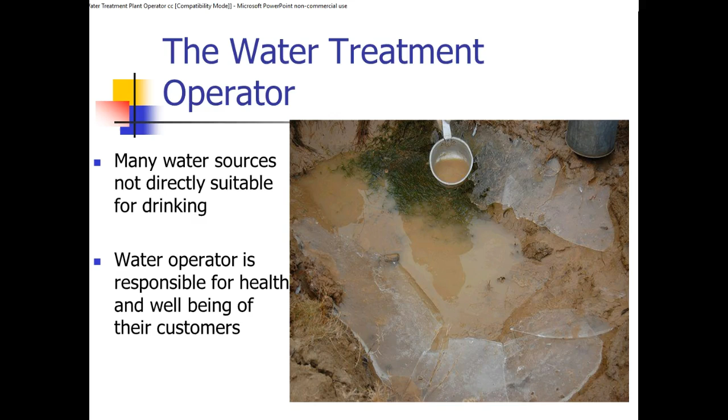The water operator is responsible for the health and well-being of their customers. Operators operate treatment plants to produce safe and pleasant drinking water. You know, through the years, I've tasted a lot of water, and I remember even when I was a kid, it wasn't unusual that we'd travel around to different parts of the country and actually get sick from drinking the water, and it's because of standards. They're very different all around.

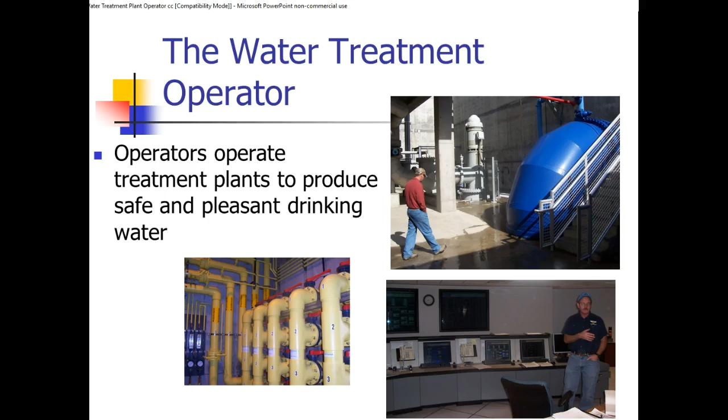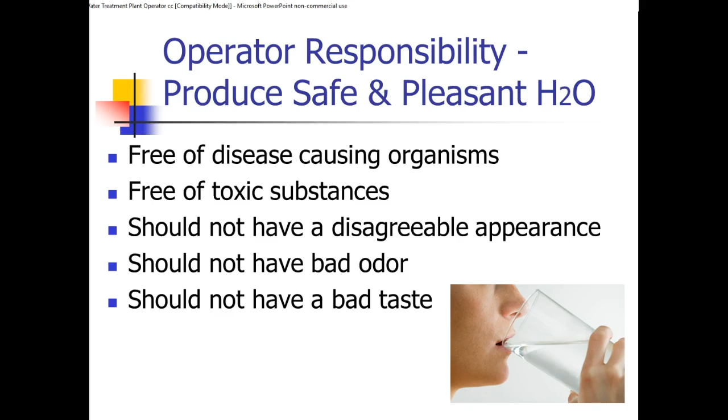But we've got all different types of systems. We have a lot of technology. We have small systems, and we have large systems. Every system's different, and that's one of the things I want to emphasize. So an operator's responsibility is to produce safe and pleasant water, free of disease-causing organisms, free of toxic substances. It should not have a disagreeable appearance, should not have a bad odor, and it should not have a bad taste.

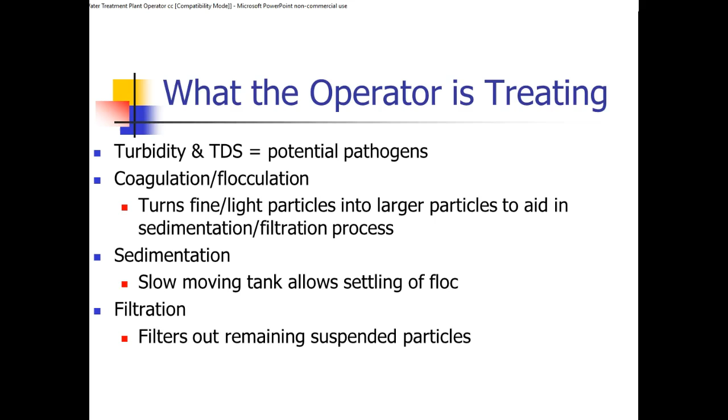So what are we treating in the water? Well, turbidity and total dissolved solids, TDS, because those actually can harbor potential pathogens. Coagulation and flocculation, what is that? It turns fine and light particles into larger particles to aid in the sedimentation and filtration process. Sedimentation is a slow-moving tank that allows the settling of the floc. Those groups that have coagulated and all stuck together gain weight and sink to the bottom of the tank. And then we have filtration, and the filters filter out the remaining suspended particles.

So we take water from the source, and we have different sources. We have two very distinct types of sources. We have surface water, and we have groundwater. Surface water certainly is lakes, rivers, creeks, all that good stuff. And then groundwater is wells. Oftentimes we pre-chlorinate to assist with the post-chlorination processes. Again, we want to disinfect this water. It passes through a series of treatment processes.

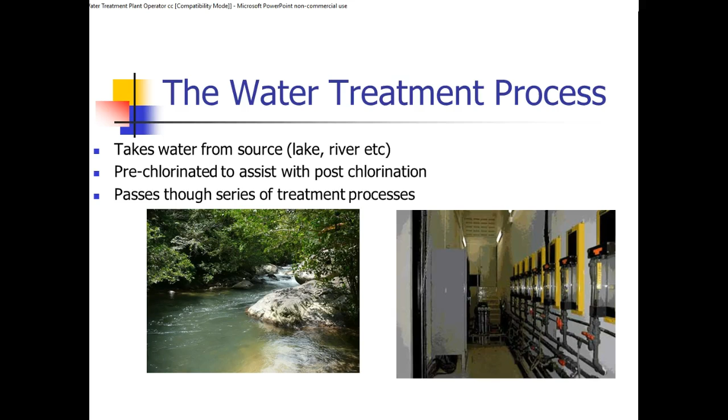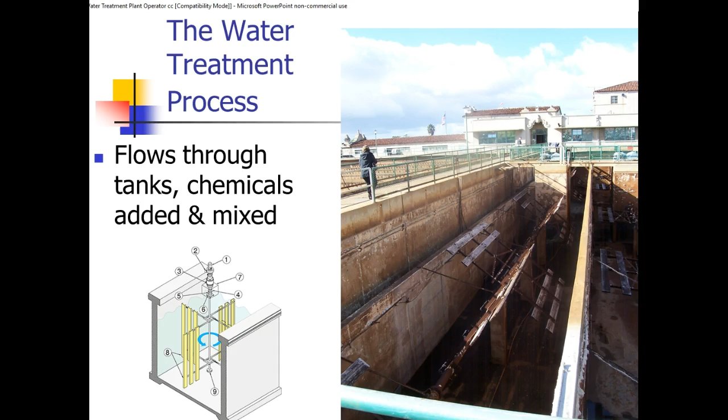It flows through tanks and chemicals are added and mixed. And you can see these big paddles. Those mix in the coagulant and the chemicals to make that start forming floc. We've got all kinds of mixers, but they're generally paddles or something that's going to be slow moving. They flow slowly into a larger tank, and they group together, and then the particles settle out. They go to the bottom.

You can see these weirs, and these weirs are notched weirs. And so the idea is all the heavy stuff's going to settle down to the bottom, and the nice clean water is just going to trickle over these V-notched weirs and go on out into the next part of the treatment plant.

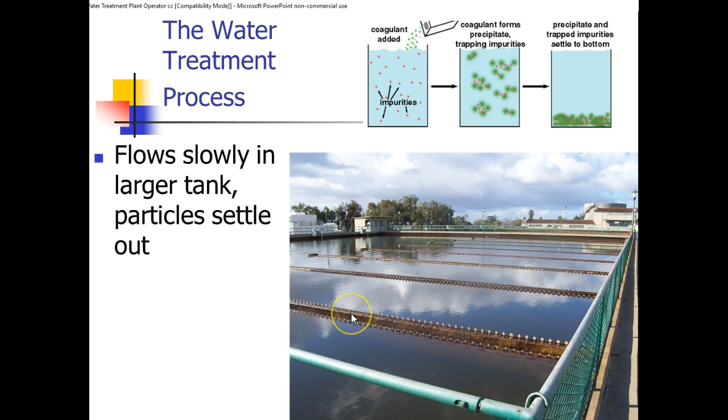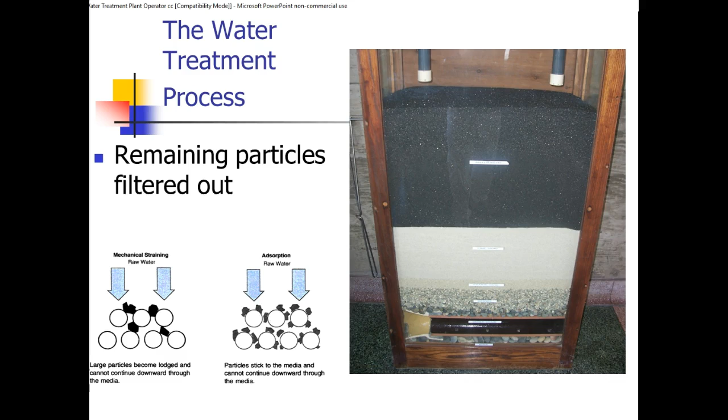So here we're looking at basically a cutaway of some filtration. We've got anthracite and garnet and coal and gravel and many different things. We have mechanical straining of raw water, and large particles become lodged and cannot continue downward through the media. And then we have adsorption of the raw water. The particles stick to the media and cannot continue down through the media.

We add disinfectants. Chlorine is by far the most common. We have three types of chlorine. We have the liquid bleach type, which basically looks like Clorox, what you get on the shelf, except it's a little bit stronger. The stuff you get in the store ranges from 2 to 7% solution. And the stuff that we use in the water industry averages about 12%. So you can see it's certainly a little bit stronger.

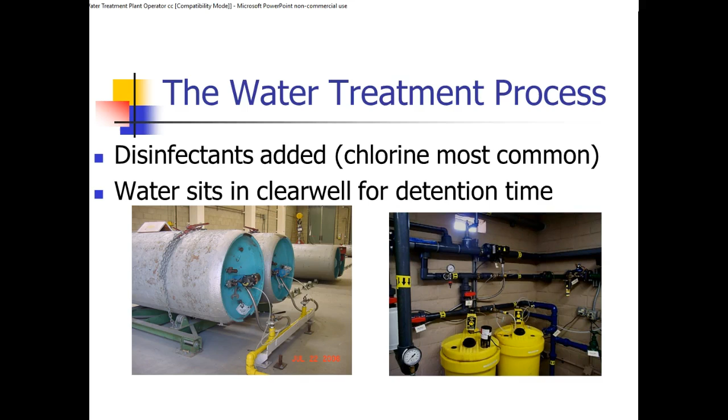Then we have calcium hypochlorite. That's the white powder, or it can come in discs or pucks. You often see that added into spas, and that's normally about 65 to 75% purity. And the third type, the most pure we have, is chlorine gas, which is also the most dangerous. It is 99 point something percent.

But if you look at this graph on the right-hand side, you can see the battery acid, obviously, is on the low end, highly acidic. And you go up to the top end, look at the soaps and the seawater, and it's kind of interesting. But you look right in the middle at 7, pure water, 7.

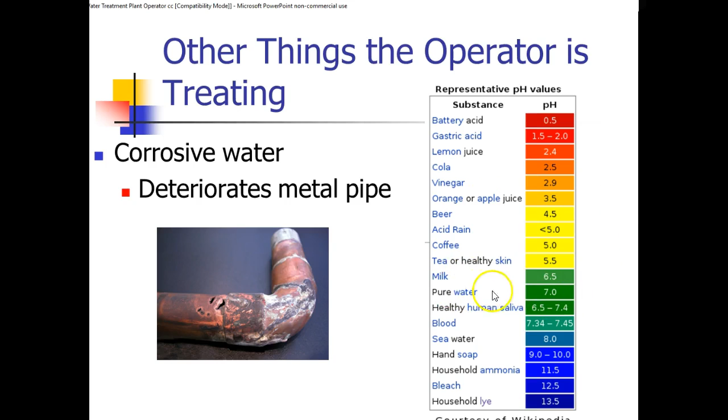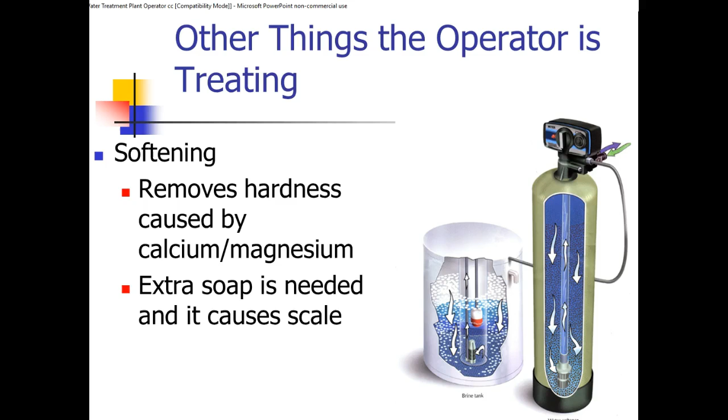Other things that we're treating: we're softening the water, we're removing the hardness caused by calcium and magnesium. I don't know if you've ever gone and washed your hands at somebody's house, but the soap just didn't seem to want to come off, or you were in the shower. And that's a sign of too much hardness.

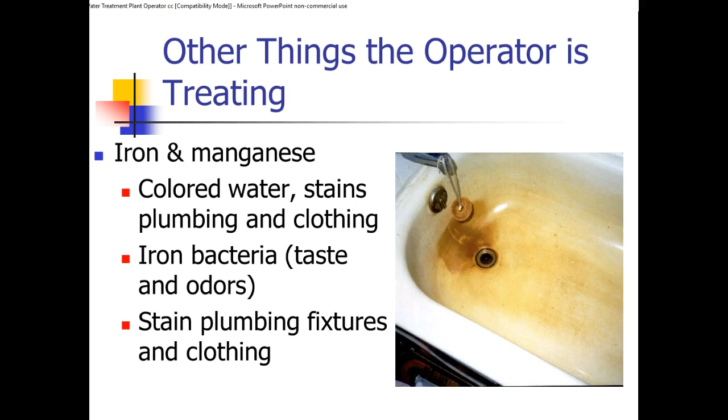So other things that the operator is treating: iron and manganese. Iron and manganese are naturally occurring in the earth. It's colored water and stains the plumbing and clothing. Iron bacteria, taste and odors, stains plumbing fixtures and clothing.

Treatment plants come in all sizes. Here's a small little standalone unit. And one of the futures of treatment is these little individual units that are actually going to be quite smaller than this for residential use. You're eventually going to see residential miniature treatment plants on all homes, period, with some disinfection, some kind of filtration. In the rural areas, there's a lot of good water that comes from wells. But again, that's changing.

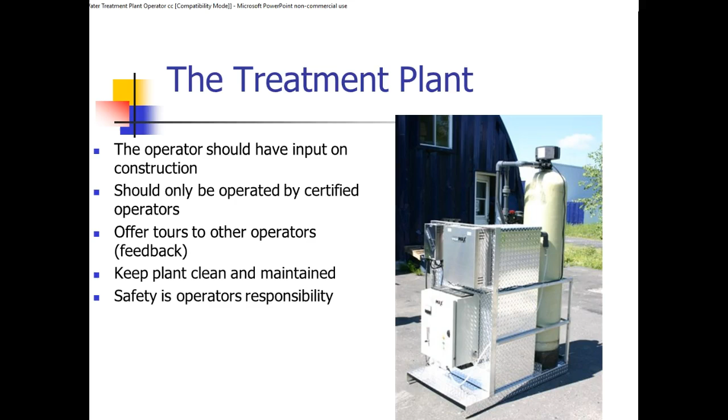A greensand filter is the most common type of filter. It's a special type of sand they call greensand, and it's a gravity filtration. So it's a very slow process of the water going down through it. It's not highly efficient as far as the volumes, but for operators, it's a very simple system because it's a gravity flow that goes down through the system. You often see these systems on small water plants.

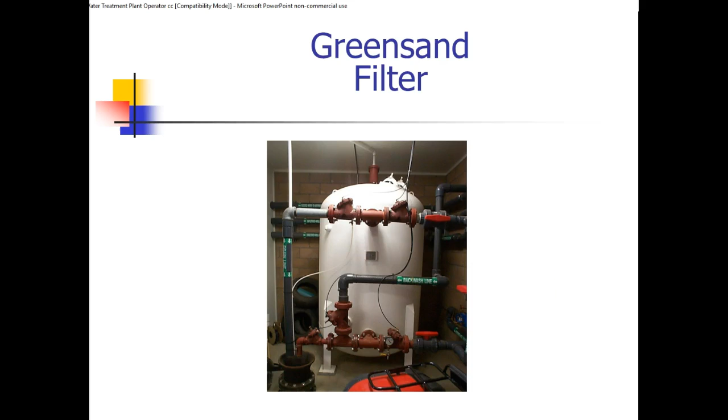There's another one. And again, Culligan, I don't know if you guys know that name, but they are really big in the water treatment business. And they were around even when I was a kid. We used to have a water softener when I lived in the Midwest, so we had very hard water. And the Culligan man would come around and actually bring us bags of salt to put into the softener.

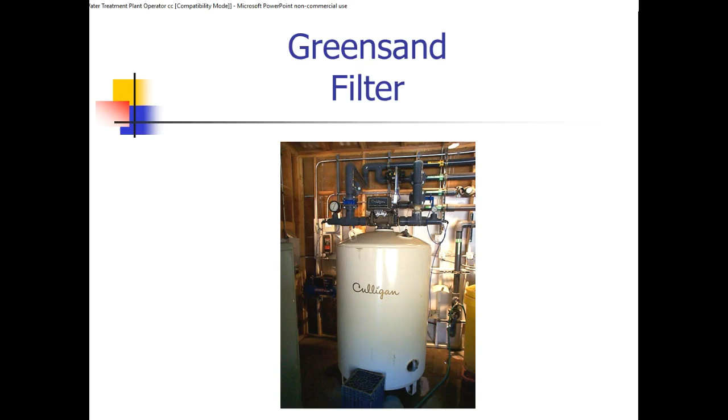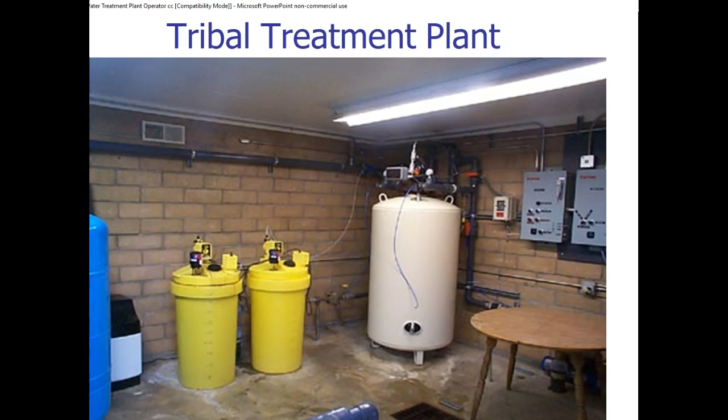Chemical feed systems: these are diaphragm pumps, and they dial in and basically pre-measure into that. And again, a lot of it is digitized at this point, but it basically defines how much feed is going in, mixing the chemicals.

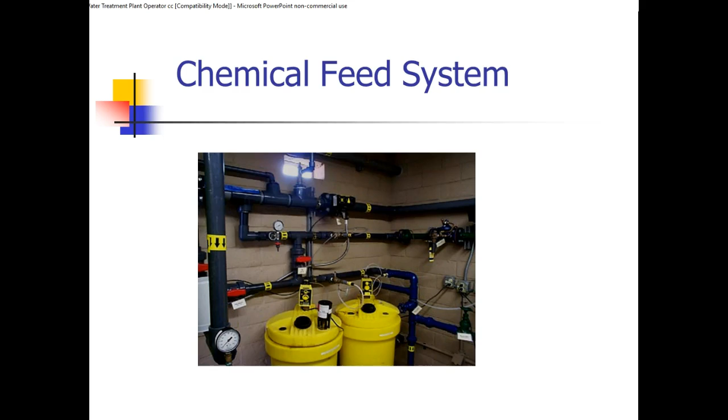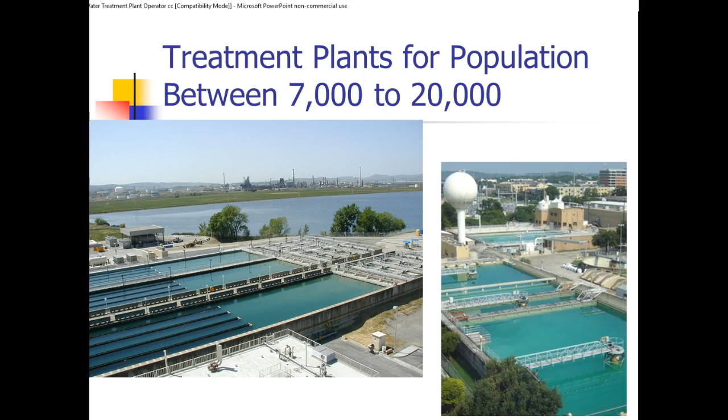So we've got all different types and sizes of plants. We've got plants that literally treat in the cities. And these are some pretty big plants if you look at these, thousands and thousands of gallons. The way they're normally measured is million gallons per day. So the plant on the right could be a 50 million gallon per day plant very easily. Then you look at the really big ones, and this one's in Philadelphia. And look at this. This is the 5 or 6 story building here. So again, that gives you the idea of the scope of a large system like that.

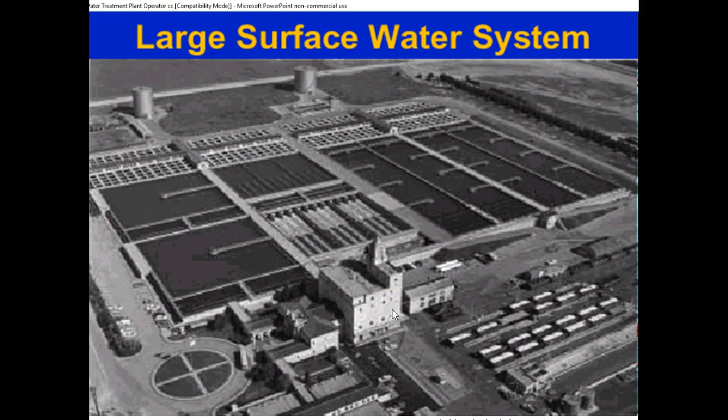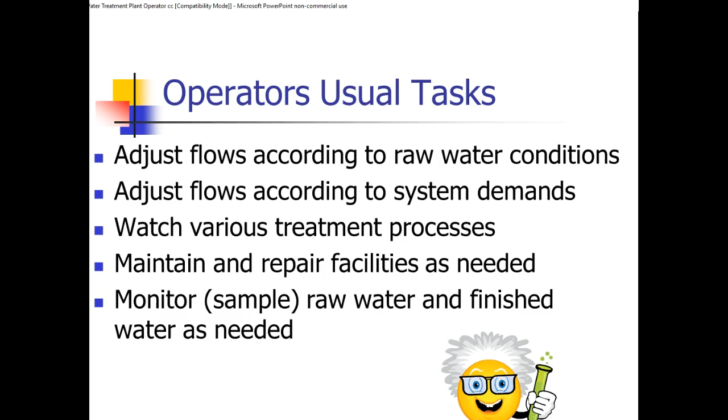So what is an operator's usual task? He or she adjusts the flows according to the raw water conditions, adjusts the flows according to the system demands, watches various treatment processes, maintains and repairs the facilities as needed, and monitors or samples the raw water and finished water as needed.

There's Mrs. Jones. She complains all the time. And you know what? We have to pay attention to her. Because the one time we don't pay attention to her, it's probably going to be the time that's going to bite you. But anyway, your customers are the ones that pay your salary, so you always want to respect them and treat them with dignity.

And again, some of these people, unfortunately, sound like broken records sometimes. But when you record a complaint, you want to know the who, the why, the when. You want to get as much information as possible. And you always want to make sure that you thoroughly investigate the complaint. You notify the customer lodging the complaint of the findings.

A simple follow-up phone call. Hey, Mrs. Jones, we looked and we didn't find anything, but we certainly are monitoring the processes. And then you notify the customer of corrective action. Well, we found that it was a little bit too hard, so we added some additional chemicals to soften it up a little bit. On and on.

Job opportunities. Huge in this industry. 10,000 jobs in the next couple of years in California alone. You have population growth. The baby boomers in this industry are retiring. There's a huge skill gap between the old-timers going out and the new youngins coming in. And so in this opportunity, there's 5 grades of distribution as well as treatment.

With what you're taking in this course, you're going to be able to, theoretically, test through grade 2 on both treatment and distribution. Now, once you get a couple years in, you can become a grade 3 operator. And when you become a grade 3 operator, you're making it.